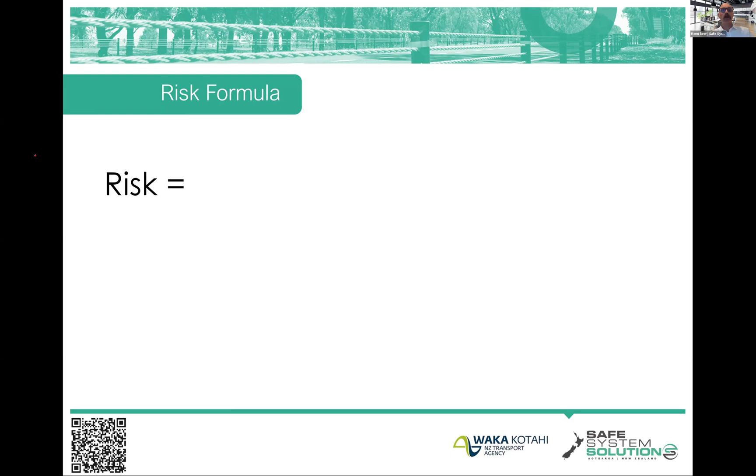But this is not just road safety risk. I'm talking about economic risk, environmental risk, occupational health and safety risk, risk on the road. We always talk about what is the chance a bad thing is going to happen, and then what's the magnitude of badness. What's the risk of an earthquake? It's the chance there will be an earthquake, but then how big is that earthquake? What's the magnitude of that earthquake? That's the risk of earthquake. You can, for everything, that's what it is.

Now, interestingly, in a safe system assessment, so that's the first component of a safe system audit, remember, there was a decision to extract out exposure from likelihood. So let me explain a little bit what that means.

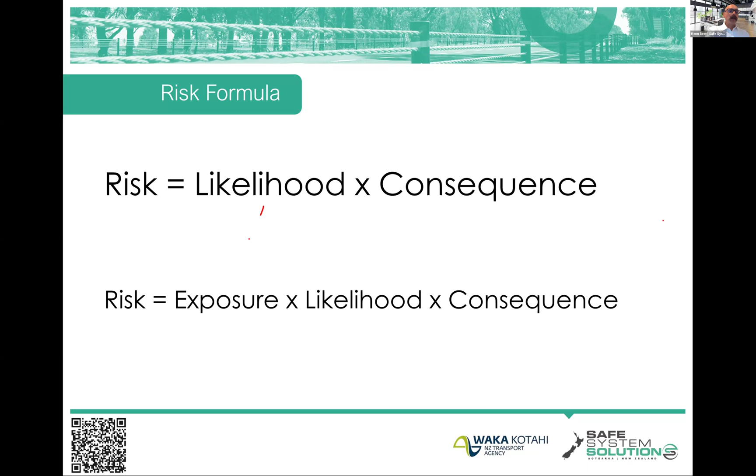When we looked at risk on the road network for a very long time, we always talked about, well, what's the chance of a crash? And then what's the severity of that crash going to be when it happens? And the chance of the crash was driven by the number of people exposed to that crash, so just the sheer traffic volume, or the number of pedestrians crossing, or the number of cyclists using that route. Okay, likelihood was really driven by that. And then within the likelihood of crash was physical infrastructure characteristics, such as was it a high-speed environment, a low-speed environment? Was it very clear where the crossing was, or who had priority, or these sorts of things?

So the decision was made in a safe system assessment, the first part of the safe system audit, to say, well, let's take that exposure, the number of people exposed or number of vehicles exposed to a crash, and let's extract that out of likelihood. Then we'll just look at the likelihood of crash just from the physical characteristics of the road environment, and maybe the people using that area. Are they all intoxicated, so they're more likely to have issues, or are they all very alert and compliant, or the like? And then when the crash happens, how bad will it be?

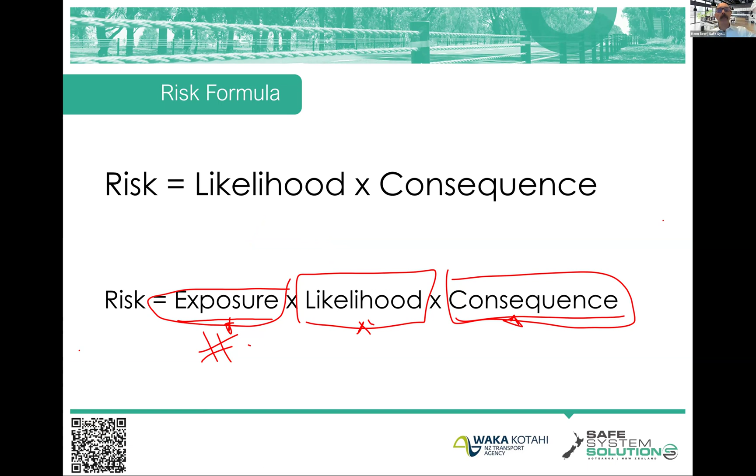So let's just recap here and get our head back in this exposure, likelihood, and severity space. Exposure, because that's the number of people, the number of vehicles that are exposed to a crash, it really comes down to what's your traffic volume, or your pedestrian numbers, or your cyclist numbers. In safe system assessing and safe system auditing, I just want you to think of exposure as a number. What is the number? What is the volume? What is the AADT, the annual average daily traffic, or what is the pedestrian numbers per day? Numbers, right?

And then we can influence the number of people exposed to a crash by doing things like closing a road, or closing, in this case, a level crossing. So it's kind of closed. It's a bit hard to see, but there's no exposure.

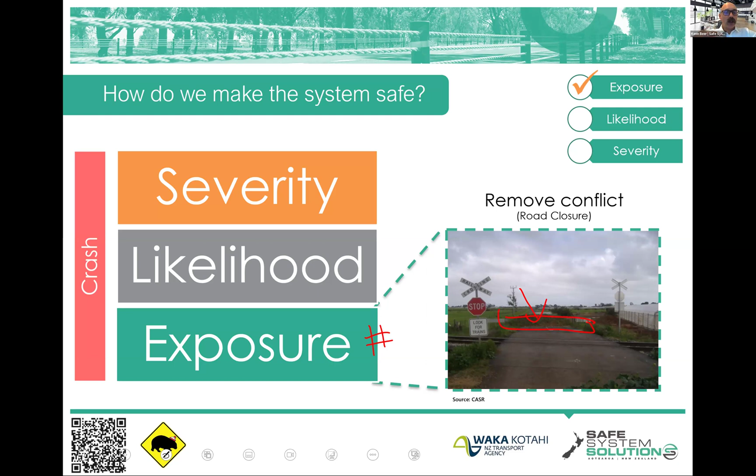Or making it so there's no exposure to a particular crash type. That might be separating vulnerable road users, pedestrians or cyclists, onto their own path, so they're not exposed to that vehicle-to-cyclist conflict, or a lot less of them are. So we're thinking about numbers.

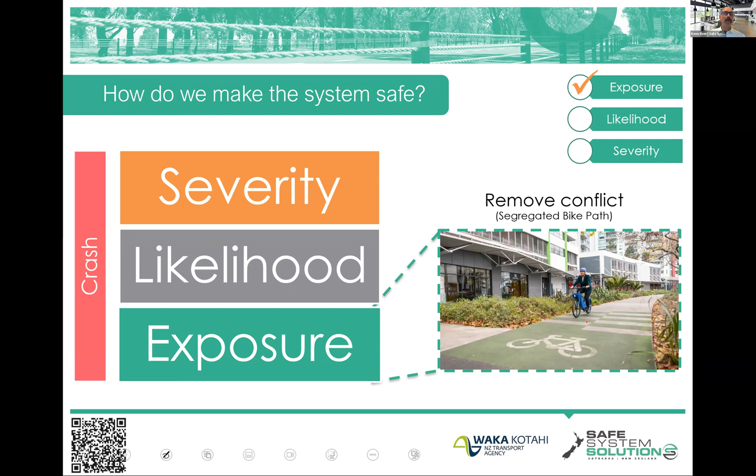Likelihood is about a whole lot of things we've done for a very long time in road safety, things like the surface we provide, sealed shoulders, line marking, lighting, and the geometric design, how the road curves. These are all things trying to stop crashes happening, help people keep control of their vehicles, stay on the roadway, and if they do see something, avoid it.

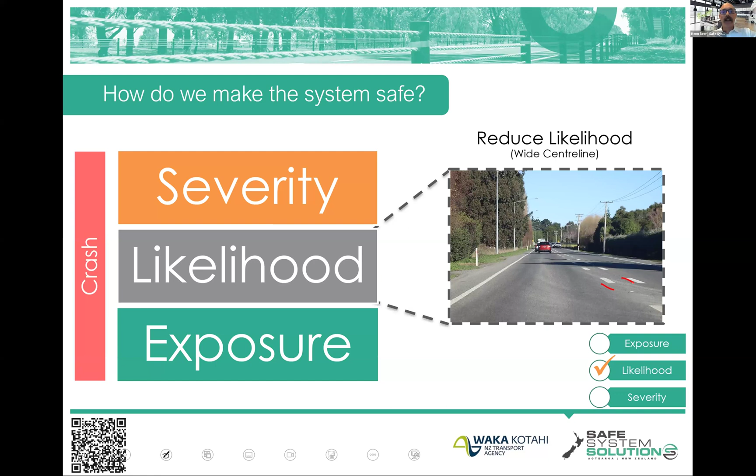So we continue to work on ways to lessen the likelihood of crashes. Things like wide center lines really lessen the likelihood of a head-on crash, but they're not doing anything for the severity of it when it does occur, because it's the same speed of vehicle, they still crash head on at the same speed, and the same severity outcomes are there.

So that's likelihood. If we look at intersections, things like traffic signals influence the likelihood of a crash. There'll be a whole lot of changes in crash profile when you put a set of traffic signals in place of a passively controlled intersection, that's a give way sign or a stop sign. There'll be a change in dynamic, but what you will see is that you still have crashes occurring at the same severity levels. There'll be less of them, but that severity level is absolutely still there.

And that's because people run red lights. They miss them, or they're trying to beat the lights, these sorts of things. We see the same angles of crashes, same speeds of crashes, sometimes even higher. So the severity is still there, but there's less chance of crashing because everybody should be clear on when they can go and when they should stop. Yes, mistakes are going to happen, and we need to factor that into our thinking as safe system practitioners, but there'll be less crashes, absolutely. That's well evaluated, well defined. The severity remains.

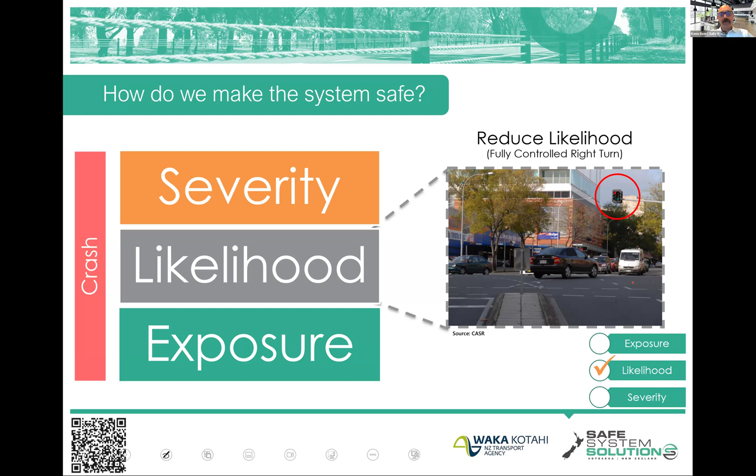So how do you actually address severity of crashes? Well, you only have a small number of things in your toolkit to address severity, because it's biomechanics of injury and physics. That's what we're working with here.

So speed is going to be a huge one in severity outcomes, because our kinetic energy equations have squared terms in them. So the more we can address speed where crashes are going to happen, the less the severity of the incident. So speed is one.

Angle is one. The angle of crashes, especially and predominantly with passenger vehicle crashes. If we can get more angle on crashes like that, we see more of the energy pushed out into the environment, so they bounce off each other. That's your year 11 vectors, if you remember physics class. I hope you do, I hope you were paying attention. But if you can get more angle on that crash, you get a less severe outcome, because the energy of the vehicle is not getting pushed into that other vehicle. Some of it is a bounce off, essentially.

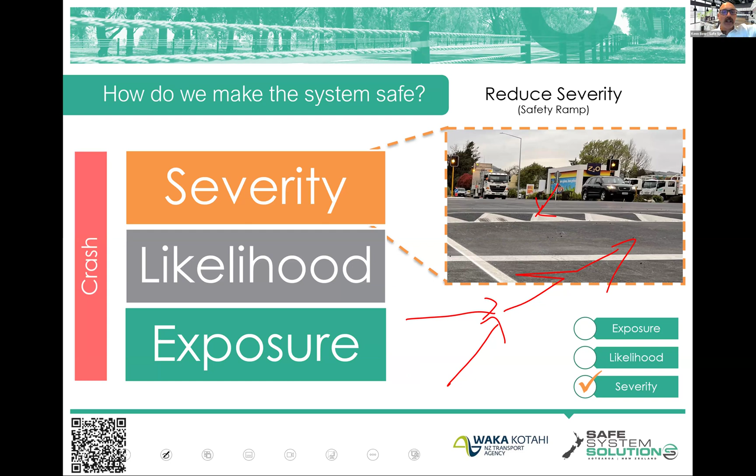Barrier systems are all about the severity of crashes, because when a vehicle leaves their lane and hits a barrier system, that is a crash. But that crash is managed in terms of the energy, where the energy is dissipated over time along the system, as opposed to a tree or a culvert, where they abruptly stop and all the energy transfer happens very, very quickly. Now we can dissipate that energy over time, which significantly lessens the severity of crashes.

But if you're looking at infrastructure and saying, okay, we're putting a barrier system in to lessen the chance of a crash, that's not correct. We're putting a barrier system in to lessen the severity of crashes that occur. Actually, putting a barrier system in increases the likelihood of crash, because take the median for example, we've put something throughout the whole median to hit. Some of the vehicles, when there was no median barrier there, would have left their lane, gone into the opposing lane, got a fright, and gone back into their lane and carried on. No crash would have happened. But putting the barrier system in means that they hit a barrier system, they're involved in a crash. We just know that that's going to be a very low severity incident.

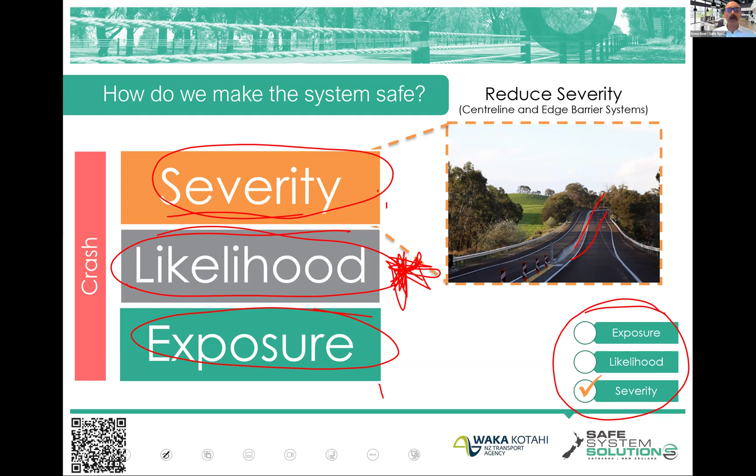So what we need to do then is make it so that when mistakes happen, because they absolutely will, we've addressed either the severity or exposure. Okay, so hopefully that makes a bit of sense, and you'll see why I've harped on about this for a while, because you cannot do a safe system audit under New Zealand's safe system audit framework without understanding what is severity, what is likelihood, what is exposure.

And in fact, you're going to get an assignment at the end of today, which is quick, but it is all about, can you categorize exposure, likelihood, severity? Loretta, have we got questions already?

Thank you. Yeah. Look, you may have covered this, so forgive me, but I'll just read through what Max wrote in the chat. Isn't that somewhat ethically problematic if volumes of, say, pedestrians are low because a road is unsafe? Using exposure to affect the process might perpetuate an unsafe situation and could even lead to perverse outcomes, such as a project that is increasing pedestrian numbers could have a worse safety outcome afterwards, even if likelihood and severity stay exactly the same.

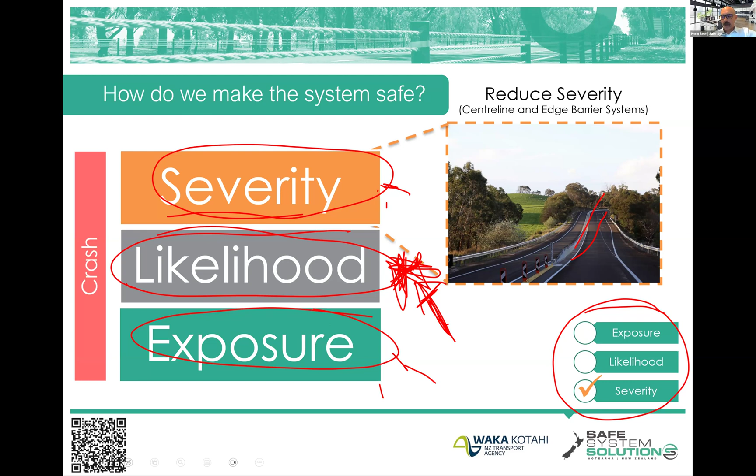We've got a few examples there of different features that would lessen the likelihood of crashes: rumble strips, chevron alignment markers, and yes, Max talking about swimming with the crocodiles. That's a good point.

Let's start to apply this exposure, likelihood, and severity thinking, categorizing those elements of risk into different road environments. This session I'll probably be a little more focused on vehicle-to-vehicle crashes. Next session is all about pedestrians and cyclists and how this thinking applies directly to those road users, and we'll chat a bit about motorcyclists later. I'll be focused on vehicle-to-vehicle crashes, which currently is dominant, along with single vehicle run-off road, as your dominant sources of death and serious injury in New Zealand. However, over the next 20 years that's probably going to change.

Vehicle technologies are adding more and more reduction in that percentage of crashes, so other road users become more and more dominant portions of our death and serious injury on the road network.

Intersections present this really interesting risk point in the network, and there's an obvious reason for that, you can see it on the screen there. We've got conflict points, which are simply the ways that vehicles can crash with each other, or vehicles could crash with pedestrians or cyclists. I'll show you a conflict point diagram later on.

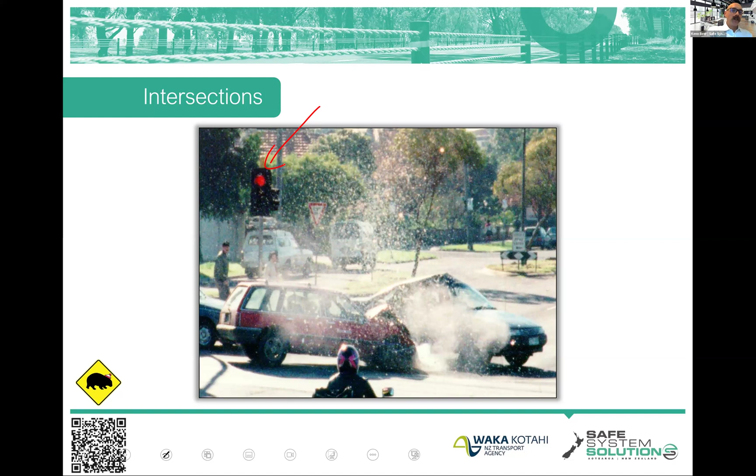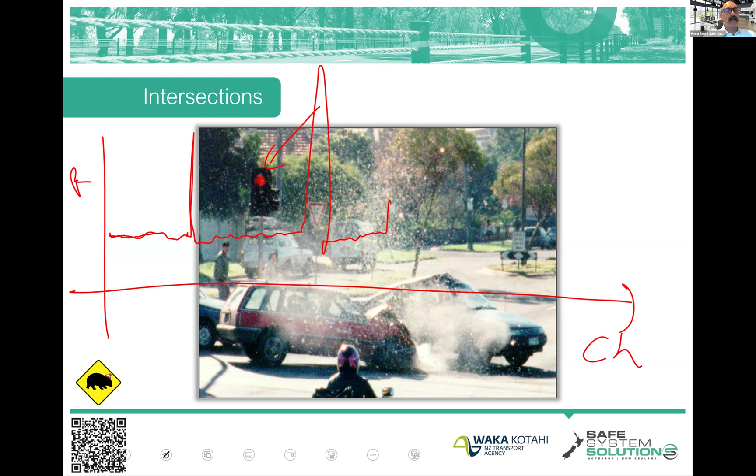What you see if you ever get a plot of risk along a route - this is chainage down here, which is the distance along the road, that's the term we tend to use, and this is risk up here - is that risk will be bubbling along in the mid-block sections, and then it'll pop up at an intersection, pop up like that. So at intersections, it's not just the vehicle-to-vehicle crash, it's the run-off road, and it's also a location where pedestrians and cyclists are going to be crossing. We have this big exposure of others to crash forces.

Now the severity matrix we're thinking about really asks, okay, what's the speed the crash is going to happen at? Not what is the speed limit, but what is the speed the incident is going to happen at? It's often very driven by speed limit, but what is the speed the crash will happen at? And what is the crash type? Here are a few examples just to keep you thinking along those lines.

We've got pedestrians versus heavy vehicles. We've got car versus car, side impact at a right angle. We've got trees, so cars hitting trees. We've got head-on car versus heavy vehicle.

And you can start to get an idea from this how bad you generally expect the outcome to be. And of course, there'll be outliers - things that happen where you'll see death at a very low speed, or people surviving very high speed incidents. But there's a general indication for you, and in fact it says that down there, doesn't it - general indication only. But we'll be using these numbers later down the track to get that idea of severity.

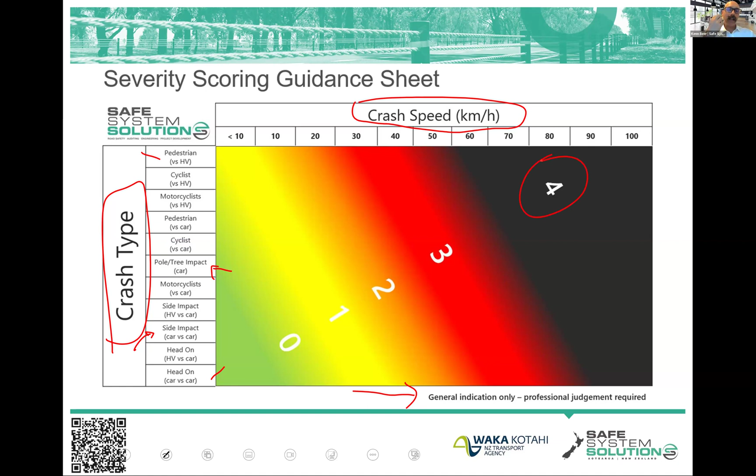This is one of the real beauties of the safe system audit approach, using safe system assessments first - it forces everyone to think about the severity of incidents. For so many decades, a lot of, especially infrastructure engineers, have simply focused on stopping crashes happening. And that's been a really important thing to happen and really wonderful.

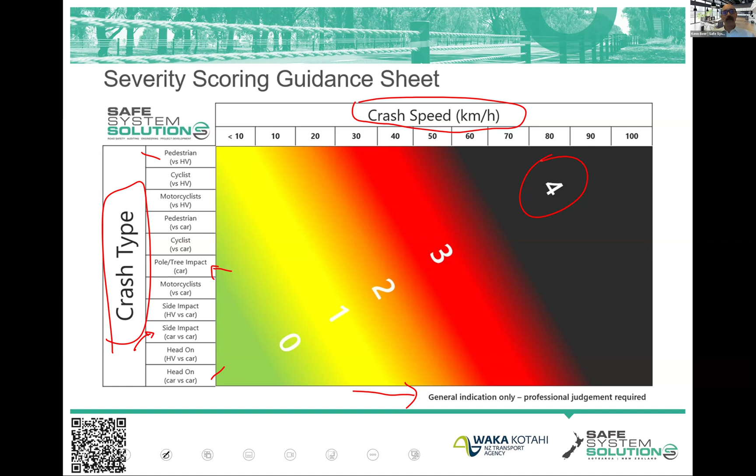But mechanical engineering colleagues in vehicles, for example, were leagues ahead of us in identifying that okay, we're going to do what we can to stop the crashes happening with good brakes and windscreen wipers and headlights and these sort of things. But we're going to start thinking about what happens when these crashes happen. Let's go with some seat belts, and airbags, and crumple zones, and a whole lot of energy management characteristics. Us in the road space, well, there was a little bit of that with barrier systems early on, but it didn't ever get as much traction until the safe system really started to take hold.

You can get a bit more angle on it, and you can start to go up to about 60 where we sort of tend to max out to a degree. And KEMM-X, for anybody wondering what that is - it's just the kinetic energy management model, essentially a computer program you can use to delve into this in more precise detail. That's far beyond what you would ever need to do in a safe system audit.

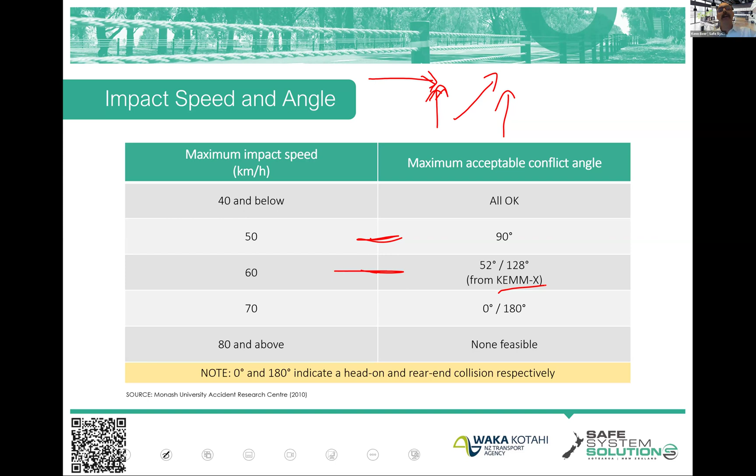You just can be fairly general in your thinking, like: okay, that looks like it's about a right angle, about 90 degrees - yeah, about 90 degrees, about 50 kilometers an hour or below. Okay, there's a bit more angle on that - yeah, so we can go maybe up to about 60. That's sort of the way you think about it.

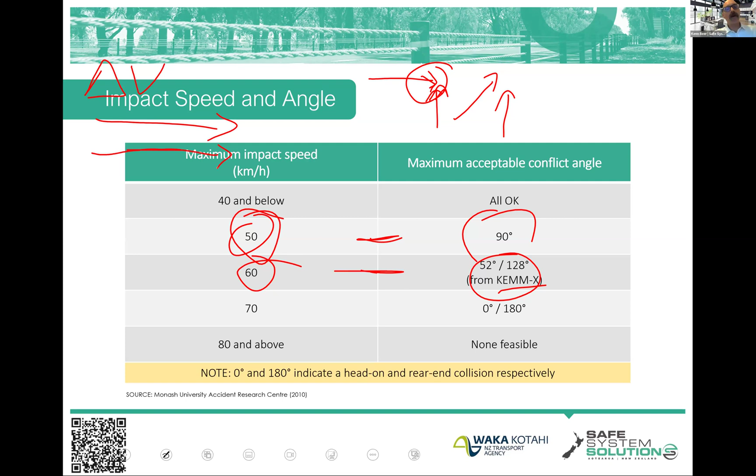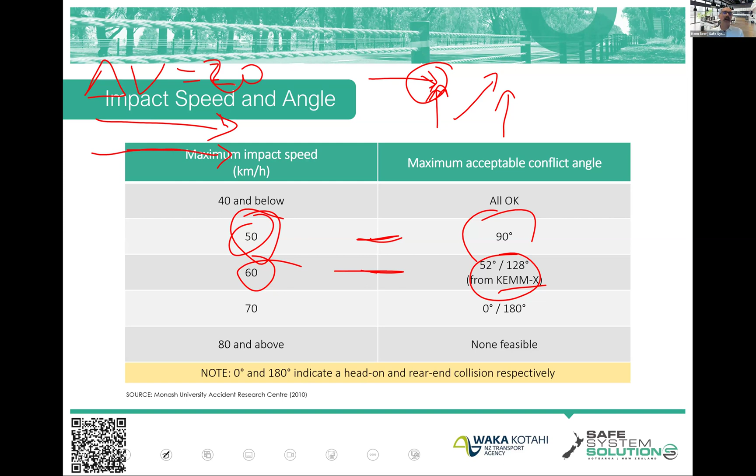But remember, this is your delta V - your delta V is this change in speed. So if you have one vehicle going at 100 kilometers an hour and another vehicle basically coming in right beside it at 120 kilometers an hour, as those two hit, their delta V is only 20, isn't it? So that's okay, that's all within sort of tolerances. You're going to have to think about what happens to these vehicles after they strike each other, but the actual transfer of energy between vehicles, we're in that sort of delta V position.

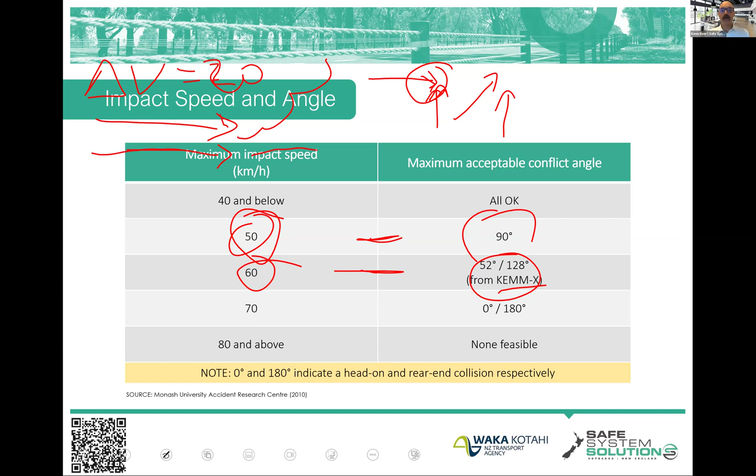So you don't need to be this precise, although if you've got somebody doing a road design in CAD, they can just overlay angles on it very easily. But for this sort of stuff, you'd really just be saying, well, a vehicle coming out of the side road here trying to do a right turn, being struck by a vehicle coming this way - well, that's going to be about a 90-degree crash, isn't it? Okay, it's actually precisely 104 degrees, but close enough to 90.

So we think, okay, we want to get vehicle speeds down to 50 or below, if it's just passenger vehicle to passenger vehicle we're thinking about. Of course, if there's pedestrians or cyclists in the mix, we may have to alter that. Over this side, we've got a vehicle coming down here striking a vehicle who's already made their turn to a degree - so 27 or some angle like that. Maybe that one's more like 60 kilometers an hour we can get to. So you start to play around with the existing parameters you understand and give that idea of where we're at.

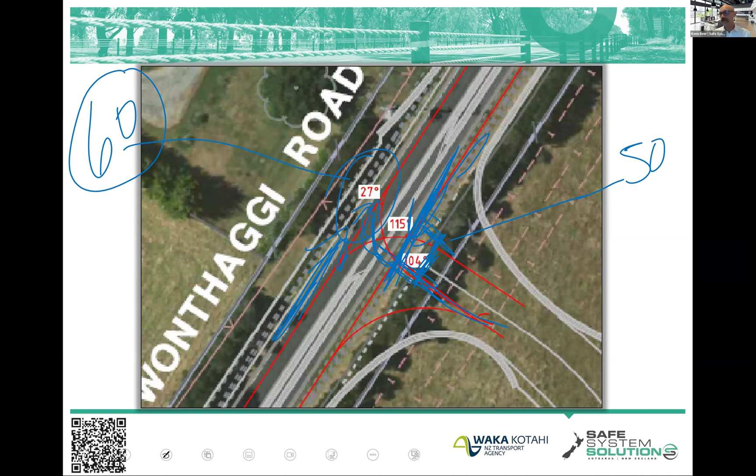Okay, time for you to do a little bit of an exercise for me. Now, I'm going to give you a good bit of time to have a think about this, and you'll probably be able to use this as a bit of a time to have a stretch as well.

I'm going to drive you into this intersection here, and I'm going to get you to redesign it to make it a safe system, or as well aligned with safe system principles as you possibly can. Our aspiration is for there never to be a death or serious injury in this area ever again. That's our aspiration, and I want you to see what you can do to get as close to that as you can.

I'll explain the area, the context of it, and then give you some specifics, some budgetary constraints and a few other things. What we've got here is a residential area, all residential. There is a school about 400 meters down this side road.

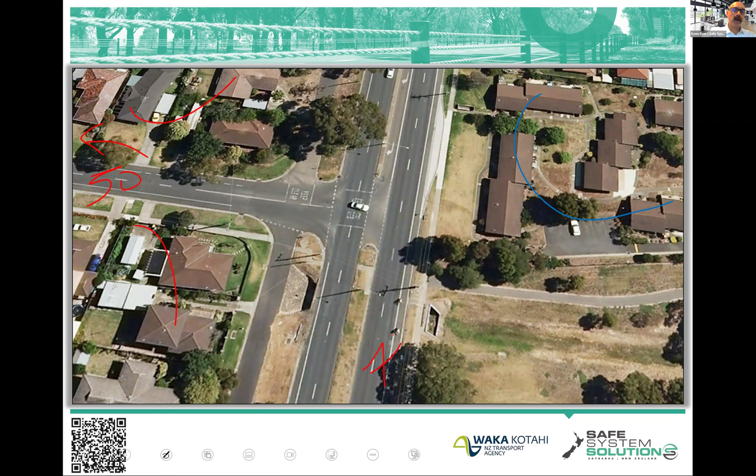This side road is 50 kilometers per hour. This main arterial state highway is 70 kilometers per hour. It's got 22,000 vehicles a day going through there, and about 12% of those are trucks. The side road has about 2,000 vehicles a day, and they're mainly just local access, going to the school drop off and pick up.

This is a shared user path. This is a drainage culvert, so water comes in on this side and drains out into this flood overflow area. That's a bus stop, and this is a bus route.

What else can I tell you? Oh, these service roads, they're two-way service roads. They have access points further down here and further up here. About 400 to 500 meters up the road this direction is a set of traffic signals, and then about a kilometer or so down the road this way, there's another set of traffic signals.

Let's just have a quick look on the ground here. That's sort of what you see - there's the intersection, there's the bus stop we were talking about. That's the side road, you see it's got a turn lane and some other features there. And on this side, you can see the drain structure, and you can see the shared path over there.

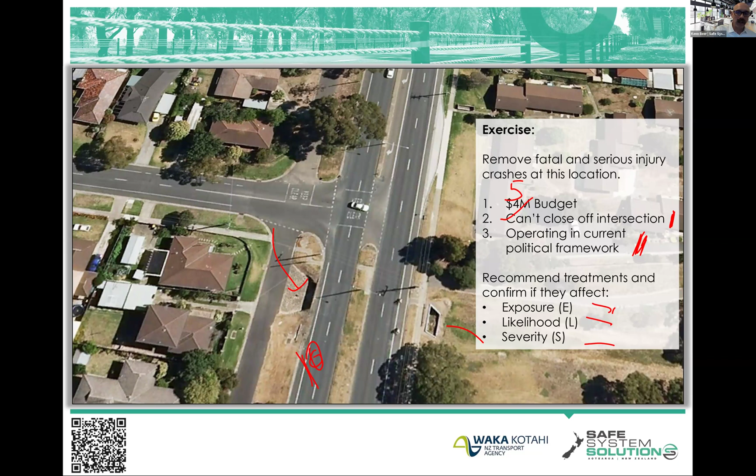All right, so remember, I'm going to give you some time now. Your task is to tell me your plan, but absolutely critical here is: what is that going to influence? Exposure, likelihood or severity, or a combination? Maybe you're doing multiple things—well, categorize each of them. Remember, if you're going to do something...

For example, one's come in there to take the road that's currently 70 kilometers an hour, which is a state highway, and drop it to 30 kilometers an hour. I might ask you, how do you plan to get that through? How do you plan to actually get that approved?

Yep, so type your solution into the chat. I'm going to give you a good 5 minutes to just have a ponder of it, categorize it, and type it into the chat. Don't just tell me what you want to do—tell me if it influences exposure or likelihood or severity.

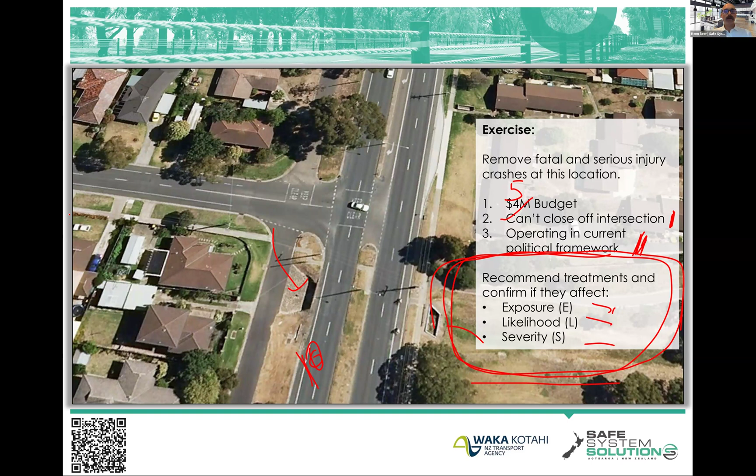Yeah, wow, amazing stuff. Okay, let's build on some of the points that people have made and some of the ideas, some of the ones that I missed as well, I jumped over because I knew I had slides associated with these that we can talk to.

So signalization is about the likelihood of crashes. We know that taking an intersection like the one we were looking at there and putting traffic signals on it will reduce the crashes that happen by about 45%. Of course, every individual site's going to be different, but if you do macro studies, taking thousands of intersections that were giveaway controlled and then became signalized, and analyze what were the crashes before, what were the crashes after, what were the changes in volumes and everything like that, we know about a 45% reduction in crashes. And that is by stopping crashes from happening.

But we know when you unpack, for these 55% that are left, they are serious crashes. Max is asking, is that all crashes or DSI, so death, serious injury, the high severity ones? Well, that's all crashes, the 45% crash reduction.

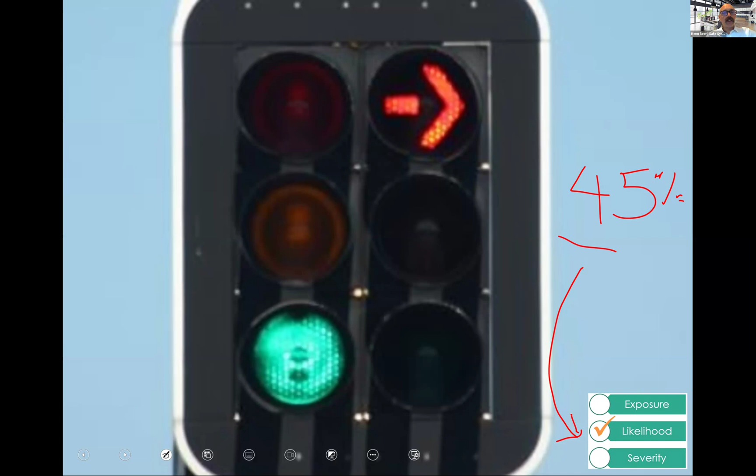This is where it becomes interesting, in the sense that we know we're reducing a lot of crashes happening, but the severity of the 55% that are left can be quite high. Yes, there will be some more minor ones, but we still see death and serious injury happening when we've signalized an intersection. In fact, I just quickly grabbed New Zealand death and serious injury data from a 10-year period in the outer Auckland area. Could have picked really any of the major population centers, and then just quickly heat mapped them and said, well, where are your clusters of death and serious injury? It's very driven by volume. But I also then just dived in to see, well, what are your intersection forms on a few of these?

I've got to change color, sorry. Let's go purple then. Okay, signalized. I think that's signalized. What I'm saying is that traffic signals are safer than give way controlled or stop sign controlled, but by no means are they safe, right? But there continues to be, pretty much worldwide, apart from parts of Europe, this impression from road designers, traffic engineers, and those managing the road system, that this is sort of the ultimate safe form of intersection until you have funds to grade separate them occasionally. We need to change that mindset. If you filter New Zealand's top 100 intersections of death and serious injury, signalised intersections dominate.

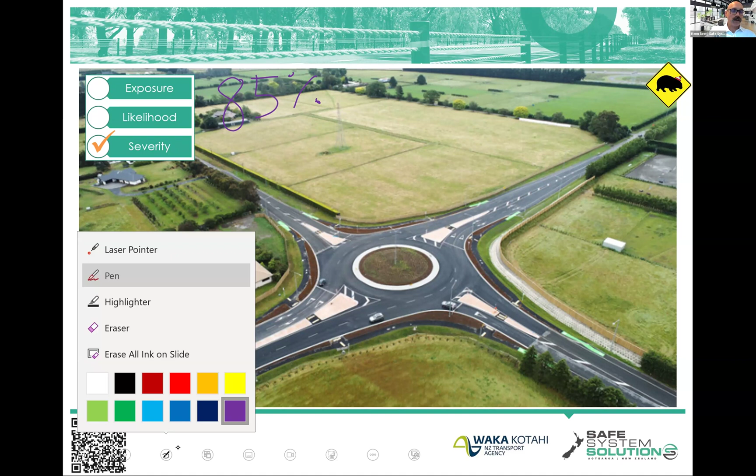Some people jumped on the idea of a roundabout. Now, roundabouts, for passenger vehicles, talking just for passenger vehicles here, we know are an incredibly safe intersection form. We know that it is about 85% reduction, if not more, in death and serious injury. In fact, it is death and serious injury in this case, because we know that you get quite a few minor crashes happening. Most of them are just panel beater style crashes, little rear enders, little side swipes and the like, very low severity. But death and serious injury is almost eliminated for passenger vehicles with the installation of a roundabout.

But it's really all about the severity of crashes. That's how we're doing it.

I'll come back to this little one. The reason I said it's going to cost 9.7 million, it's just going to be super expensive because it needs to acquire a lot of land. So that intersection we were looking at, we would need to buy houses up. We would need to move the services, the power poles, there would have been services running under the roadside, so the sewer and those sort of, we need to move those.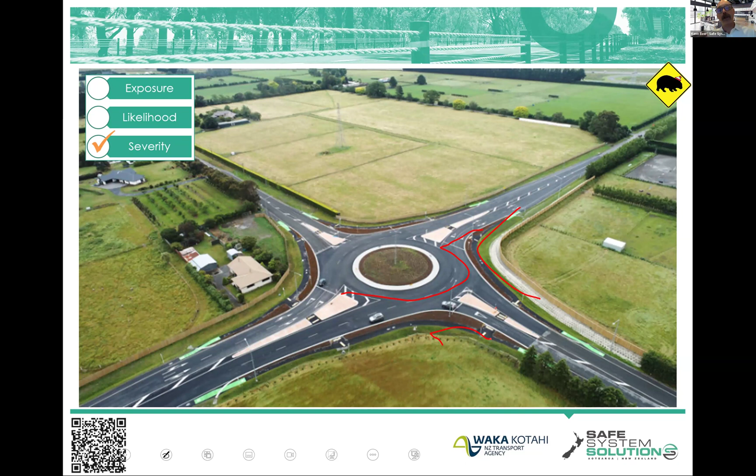Okay, this one does appear to have some vulnerable road user facilities. So I would now start factoring that into my design and say maybe we do need to get things slower, because remember, the vulnerable road user threshold was around 30 kilometers per hour or below for impact speeds. So good question though.

So, roundabouts versus traffic signals 101 here. For passenger vehicles, conflict points - these are the points of crash you can have with vehicle paths. So there's fewer conflict points, and the conflict points are the least severe conflict points we can have.

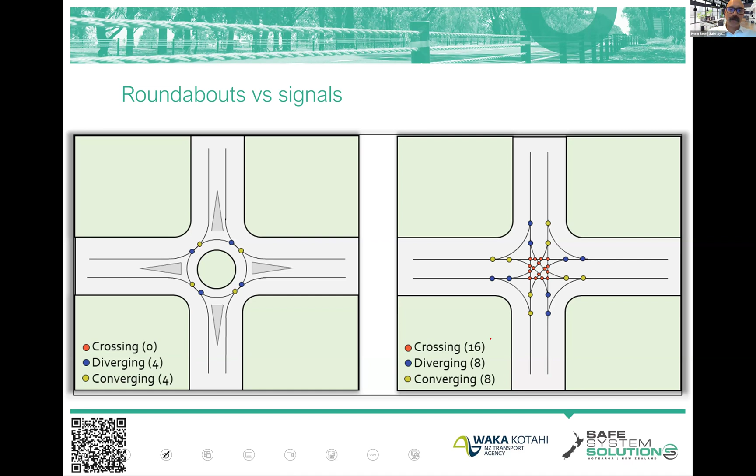The angle, as I talked about, is just a better crash. The way the crash happens is better. You're starting to all go the same direction. It's a good crash. It's good vectors.

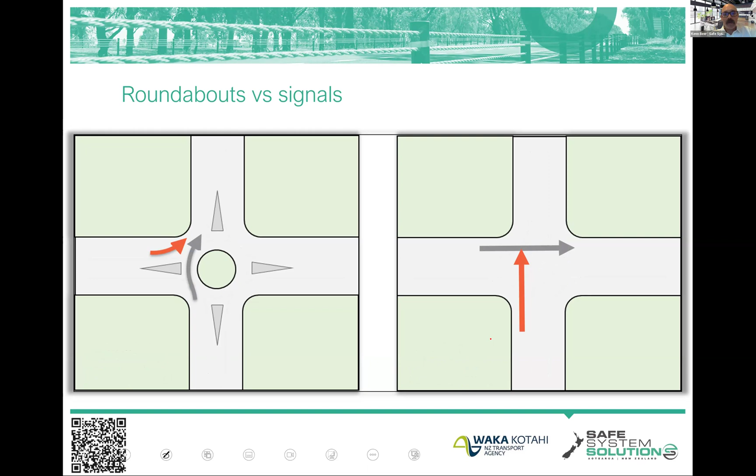And this reminds me to talk to you a little bit about waking people up, engaging them in the task. People drive in all sorts of states of consciousness. We have people who've worked a double shift, they're driving 2 hours to their brother's wedding, they've had a couple of beers, some people are thinking about a fight with their partner, or trouble with their kids.

Or you name it - they are not activated in the driving task. And I dare say you would have experienced this yourself, where you go, oh, I don't remember the last 10 minutes of driving. Okay, that's even just part of it. It's being tuned out of the whole task of being activated with driving.

A set of traffic signals does something to try to activate a driver into the driving task. But the geometry of the road just continuing straight through, nothing's really changed there. We're just relying on them picking up those clues of the lights.

We still see people shooting through these, sometimes intentionally, sometimes running trying to catch the last fleeting bit of green in it. And some people just have no idea that they ran through it.

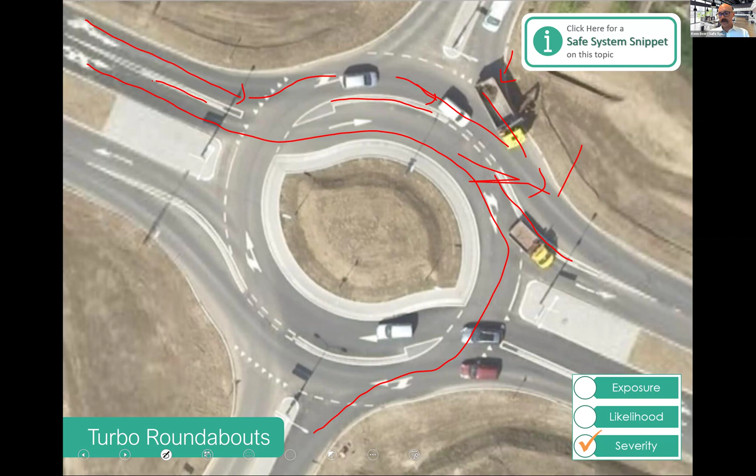What was the inner radius? The radius of the roundabout, just the radius.

Now, this one is just awesome and fun and looks just crazy, but actually, if you were on the ground, I don't think it'd be anywhere near as crazy as it looks. But this is in the Netherlands, and I flipped the image because it would be even more mind-boggling if we were all driving on the right.

But the reason I do this is we had a Dutch engineer that we'd brought over to talk about cyclists at roundabouts, and I just happened to show the Dutch engineer this one and said, oh, this is amazing, I'm just fascinated by this - it's a big signalized turbo roundabout. And I said, in Australia and New Zealand, roads of that volume, they're either going to get grade separation, but a lot of them won't - you can't afford to do that. So they'll just be a big, large, multi-lane signalized intersection operating at sort of 70, 80 kilometers an hour even. And the Dutch engineer's jaw almost hit the floor.

He said, what about the death and serious injury to your community? How could you possibly justify that? And I'm like, I know, it's insane. The Dutch would just say that is not a possibility - to operate a signalized intersection at those types of speeds. They will create these sorts of things in order to ensure that vehicles are slower, angles are better, and when people make the inevitable mistakes they're going to make, they're not killed and seriously injured, or seriously injure or kill others.

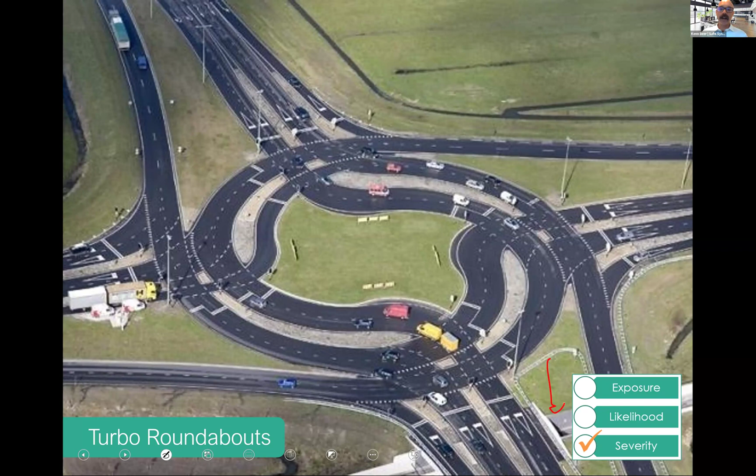Anyway, it's awesome, isn't it? And then we also, of course, we're talking about bikes. And I said, in Australia and New Zealand, we'd probably just throw the bikes through that high-speed signalized intersection as well. And of course, there's the bike facility underpassing beautifully, continuing through.

Anyway, I digress. But I like the fact that a lot of people are now starting to question some of these large signalized intersections, saying, what could we do? How could we alter things? How can we disrupt, and wake people up, get some better angles, some lower speeds?

Is that when I run this training around the world, basically - when I run this training for New Zealanders, and I do that exercise, a lot of people are now coming back with raised safety platforms or raising the intersection.

When I run this in Queensland, nobody says that. And the reason is because it is such a traditional mindset in arterial road network management. And I was brought up in that road design mindset.

Well, sitting in the region, if I had said, oh yeah, we've got a state highway, it's got 22,000 vehicles a day, it's got 12% heavy vehicles, it's a bus route. Oh, I would like to do some vertical deflection, some raised platforms. I would have been kicked out of the office. I would have been laughed at, and I would have been told this is insane. Arterial roads are for moving traffic at speed, and you don't disrupt them. You don't disrupt the freight. You don't disrupt the buses. There's ambulances and fire, and this is for vehicles, and you keep them going fast.

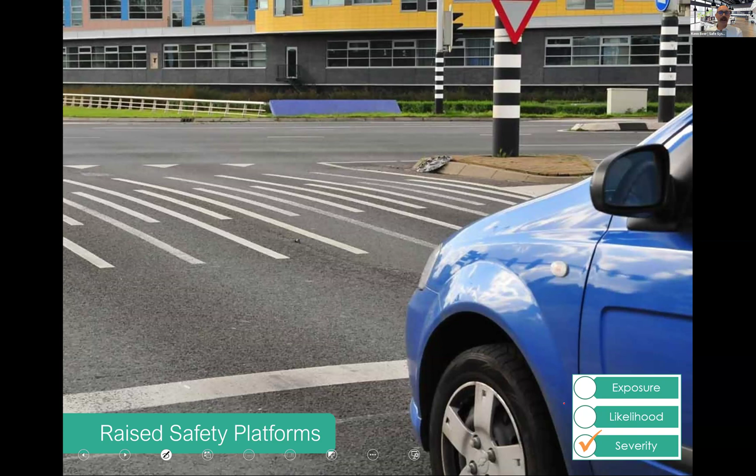Well, we've evolved. And I love the fact that New Zealand practitioners are putting this forward and saying that. And so that intersection we looked at was actually one of the first ones in at least the Southern Hemisphere, first one outside of Europe, that really looked at saying, okay, we know traffic signals are going to reduce the chance of crashes, but we have to do something about the severity.

We know other intersections in the area that are signalized, and in our region and in our country, they're signalized, and they're causing death and serious injury. What else can we do? What can we actually do to address that severity of crashes?

And like many of you, they came to the conclusion, well, can we slow vehicles using some platforms, not like urban speed humps, but just gentler platforms to reinforce you've got to go a bit slower through this high risk point.

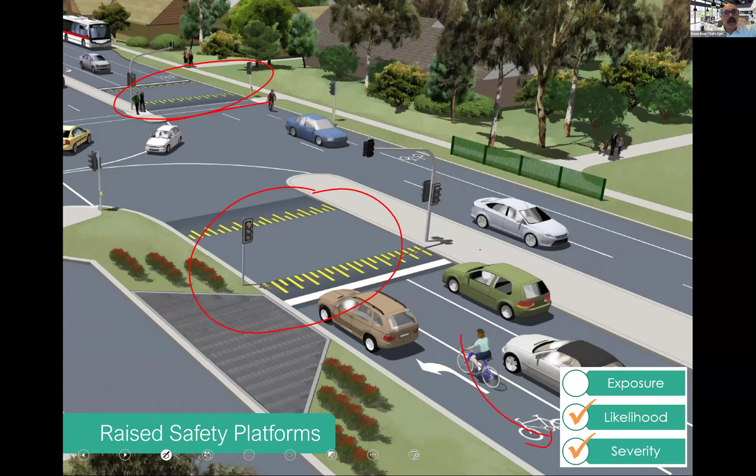But what we're really trying to do is just address bullet vehicle speed, aren't we? Those are the vehicles that are going to do the damage. The vehicles coming in and going out, they don't have enough speed to do damage. They're not bullet vehicles, they're target vehicles. They're the ones that will cop the damage of it.

It also is, I mean, there's a cost element to it, and there's an unnecessary disruption to a vehicle sort of dropping off here and on turns and things like that. You just don't actually need it.

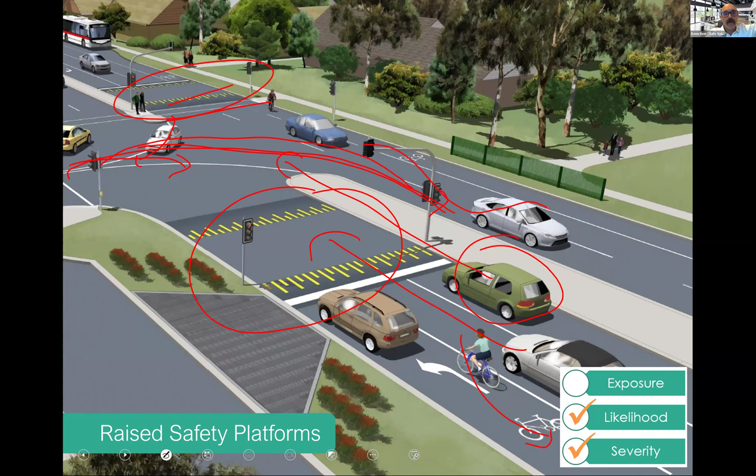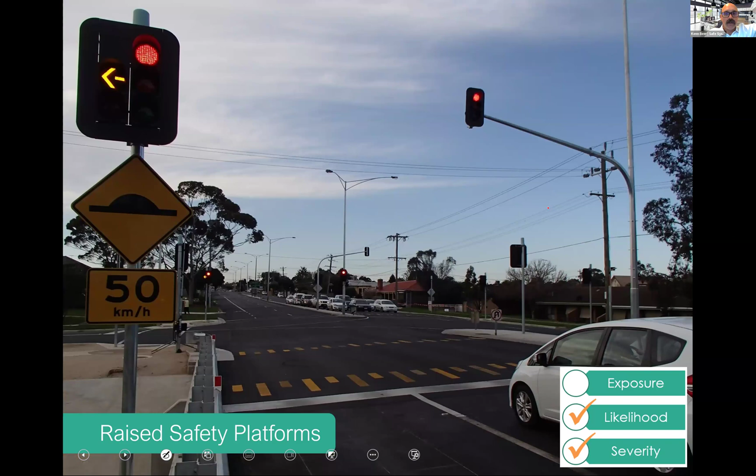So raised safety platforms. And the other thing I want to say about these, and here's a few photos of that one built. I was out there with a colleague doing the post-opening road safety audit of it. And there's a few important things I want to talk about the advantages of this.

Okay, first one is you can see advisory speeds of 50. There's advanced signs to warn of this, and yeah, it's quite visible. You don't need to actually do the challenge of speed limit reduction. Now, I don't need to tell this group about the politics of speed limit reductions, but there is, like, you put these in, okay, people don't argue about the speed they've got to travel over it, right? They might argue and get a little annoyed about its presence because it's something different. But you don't need to do a speed limit reduction.

You can do some advisory speeds through there. And people don't get angry about reducing their speed on their own accord. They tend to get angry when we put a black number with a red circle around it and demand they must when they don't feel they need to. But if they're navigating over something, and that's all we really care about, is getting the speeds down at the points they're going to crash.

I love this photo, I've got to get this one blown up and put on the wall. We've got green lights, we've got a vehicle slowing down, approaching the conflict point. Now some traffic ops people who are friends of mine hate this. Well, they don't hate it, they're just like, it's so inefficient. Why are we slowing every vehicle through this point for a 1 in 500,000 chance, 1 in a million chance something will go wrong? And I'm like, hey, if we'd put a roundabout in there, everybody would slow down and you wouldn't be complaining about that. It's just, you're not used to this, are you? So it's something different, but it's wonderful.

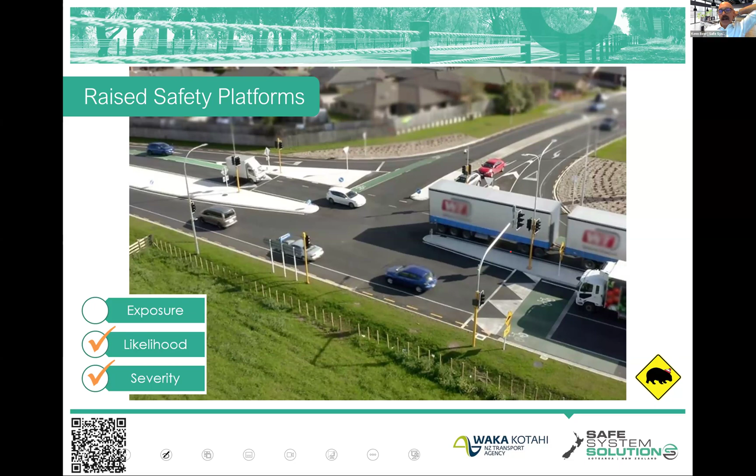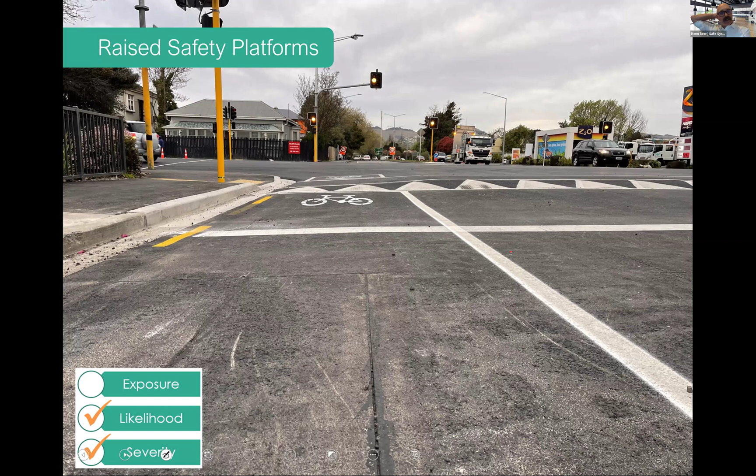I love the fact that New Zealand's starting to get out there and put in these raised platforms. Now this is the one down in Hamilton, the first one in. I spent some good time out there with Simon Crowther from Hamilton City Council, having a look at the site before, and just loving the fact that we're seeing it built. I went down and spent a long time at this one in Christchurch, again I think it's a ripper. Well done. Of course people are going to complain, it's different, they haven't seen this stuff before. It's natural, people will find reasons to complain, but they are safe system principles at its core, really. So I'll leave that there and answer some questions.

Oh, there was some great interaction there. But there was just one in regards to if there's any consideration for emergency service vehicles like ambulances on the vertical traffic calming.

Yeah, certainly. And across Australia and New Zealand, especially in Victoria, we've put a lot of these out on very major traffic ways with emergency services involved. The emergency services feedback is they generally slow down through signals anyway, and these are not a major issue for them - that's their direct feedback. They're okay with them, they've got no major issues. Frankly, some of them say, yeah, if you can do anything to lessen the number of times we have to drag dead bodies out of these signalized intersections, that would be lovely. So we got some good support from them. In the US, there's some stuff out of Hawaii on raised pedestrian crossings along the route, and the emergency services have really been coming out and supporting those strongly. So that was good.

A lot of it, I can just list all these things that people come up with that are natural for us to be worried about, but when you actually do it, they're not as much of a concern. One is noise - people are like, well this will just be a disaster for anybody in the area, the noise will be unbearable. Well, it hasn't actually played out like that with any of the acoustic modeling and things. Buses - the passengers will be flung off the bus. No, the buses simply slow down to an appropriate speed and navigate over it, and that's fine. What else? Heavy vehicle rollover - again, you just design them so, well, you don't want a weird skewed angle or anything like that, but heavy vehicles are fine. Motorcyclists, yeah, people worried about that same thing. People also worried about, oh, people are going to hit these at speed and go Dukes of Hazzard off into the houses, flying through the air and destabilizing. No, it's just not happening. People worried about rear end crashes going out of control - we see no evidence of increased rear end crashing, but that one can continue to be monitored.

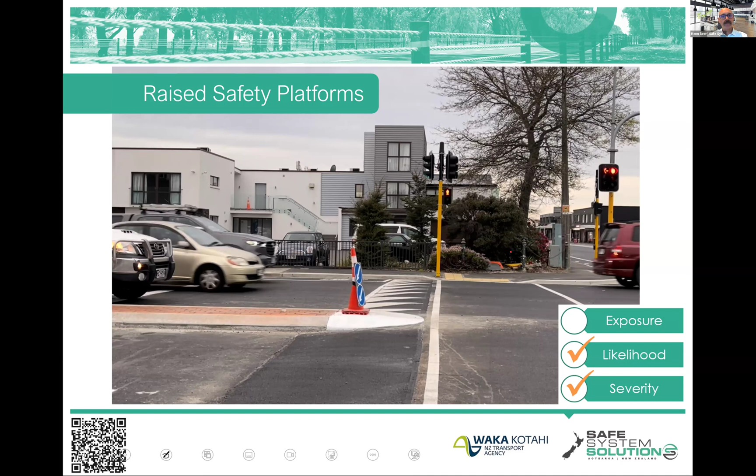There's some more pictures. I like this one because this road has 54,000 vehicles a day, and this road has 27,000 vehicles a day. These are not small intersections, but people are putting raised platforms in. I really would like that to be a 20 and that to be sharper. But anyway, that's neither here nor there.

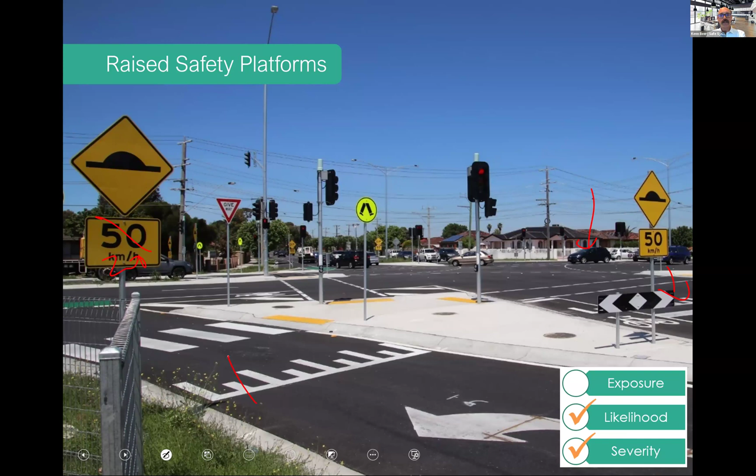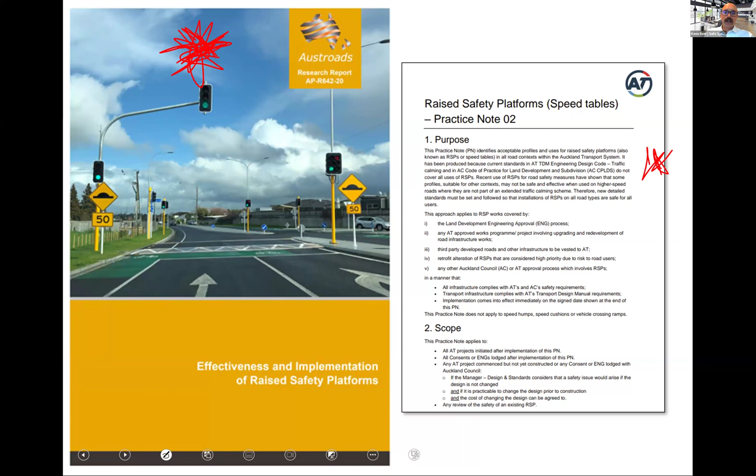Now, effectiveness and implementation of raised safety platforms. You've got the Austroads report, done by some wonderful New Zealanders, so get in and have a look at that. And there's different road practice notes from Auckland Transport, with lots of wonderful things there that you can look at.

Now, how are we going on time? What have we got, half an hour left? I think so.

Okay, I won't spend long on this. I just want to show some of the principles we're trying to achieve, where our traditional approach to the management, design, and operation of road systems has let us down a bit, just because it doesn't have the best alignment with safe system principles.

But anyway, they ended up at a point where they were just going to do some warning signs, some rumble strips, some right turn lanes, and leave it as a high speed intersection. But they said, no, that's not well aligned with safe system principles.

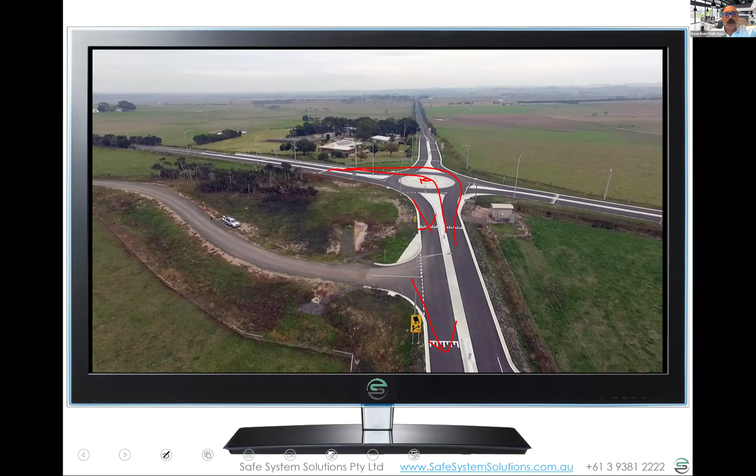But they were worried about speeds of entry and the like, so that's again where they went with raised platforms to slow vehicles on the approach. But these are gentle raised platforms, not like hitting an urban speed hump. You can adjust your platform grades to elicit different speeds.

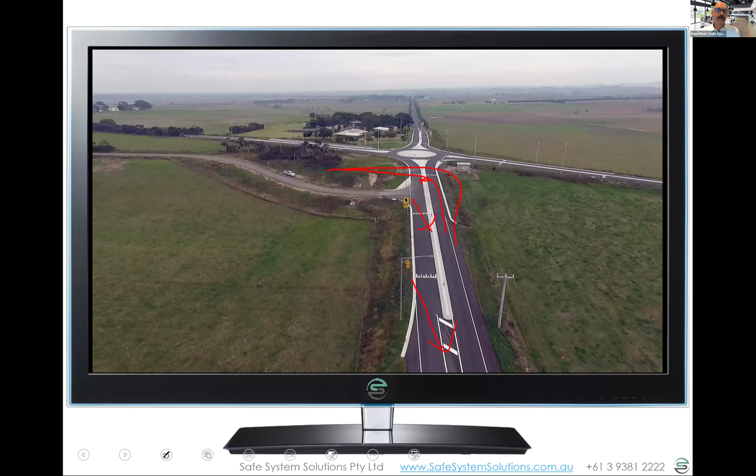So there you go. There's a good little example of the little roundabout in the middle and then the big area to go around. Anyway, that ended up costing sort of like 3.7, or maybe it was 4 million. So it's about half the price of a full-size roundabout. It's still expensive, but amazing that we could get double as many roundabouts in.

Safety effect of this compared to a normal size roundabout? Well, I'm always cautious about taking one site and saying this is what you would expect, because it's not really a statistically significant sample size. This one hasn't had any death and serious injury since it was constructed, about 7 years ago. That's great, but again, it's not statistically significant—you cannot say that means anything. We would need 20 of these, or maybe 10, to understand that, or you'd need more monitoring. But in terms of speed reduction, which you can use as a proxy for safety impact, we see wonderful speed reductions through that.